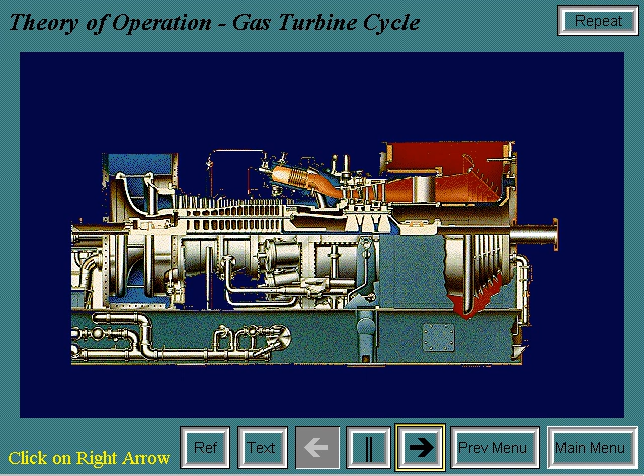A gas turbine operates by drawing in fresh air, then compressing it to a higher pressure through its axial flow compressor. Next, fuel is added to the compressed air and burned, which raises the energy level. This high-pressure, high-temperature air is then sent to an expansion turbine, where the gas energy is converted to the mechanical energy of a rotating shaft.

The conversion of work in the turbine actually takes place in two steps. In the nozzle section of the turbine, the hot gases are expanded and a portion of the thermal energy is converted into kinetic energy. In the subsequent bucket section of the turbine, a portion of the kinetic energy is transferred to the rotating buckets and converted to work.

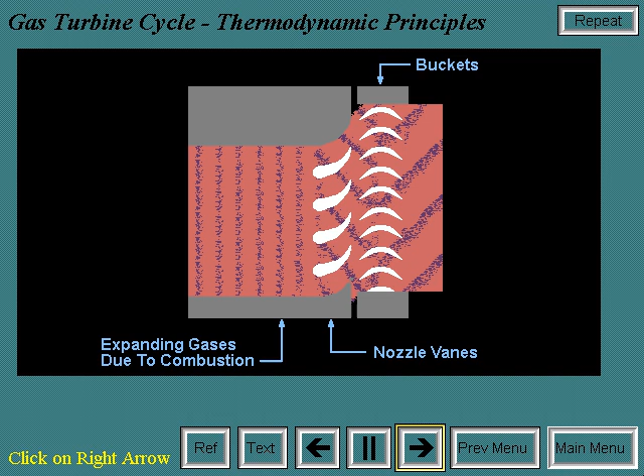Typically, more than 50% of the work developed by the turbine section is used to power the axial flow compressor. Since the gas turbine is an ambient air-breathing machine, its performance will be changed by anything affecting the mass flow of the air intake to the compressor. The most obvious are changes in the reference conditions of 59 degrees Fahrenheit and 14.7 psia.

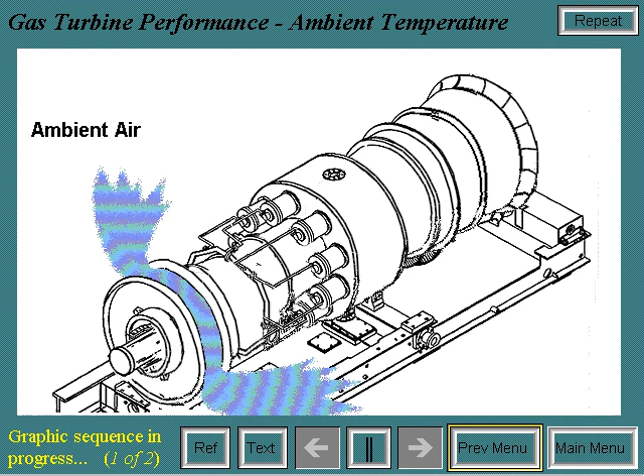Depending on the unit's cycle parameters and component efficiencies, ambient temperature will affect the air mass flow, which in turn will change output, heat consumption, heat rate, and exhaust flow.

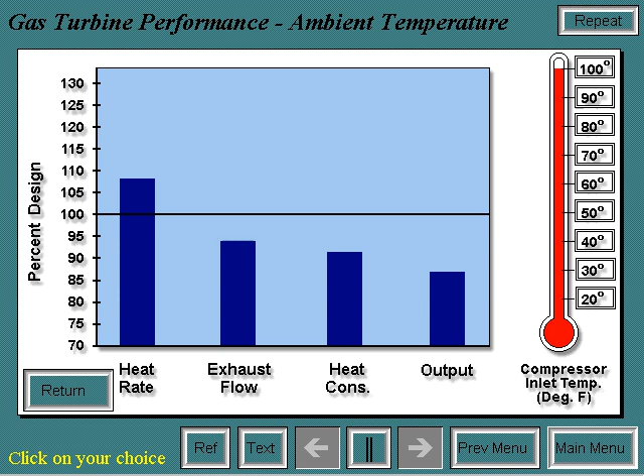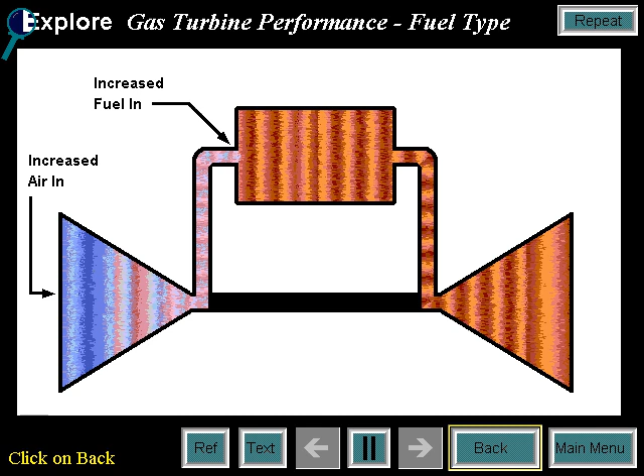When burning lower heating value fuels, turbine mass flow is increased because more fuel and air are required. This drives up the compressor pressure ratio, eventually encroaching on the compressor surge limit. This means that such a large volume of fuel is required to fire the machine that it begins to push back on the compressor discharge pressure, causing a reverse flow to occur in the compressor.

The compressor rotor is assembled by vertically stacking the wheels. First, the compressor forward stub shaft and first wheel are put into the stacking pit with tie bolts in place. Then each wheel is slid vertically over the tie bolts. In the case of the MS7000 EA, there are a total of 17 wheels on the compressor rotor.

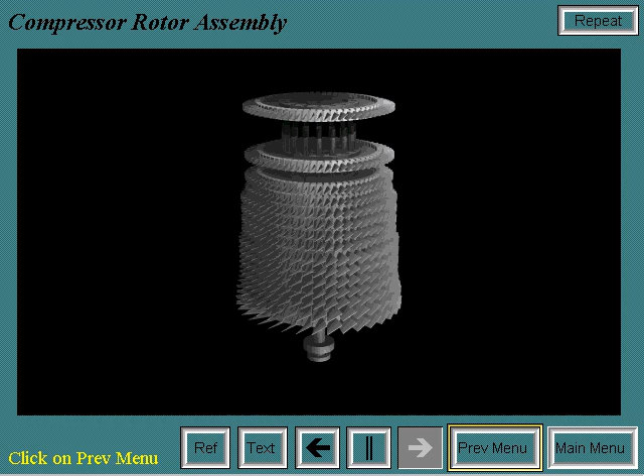Once the last wheel and aft stub shaft are stacked, the tie bolts are then torqued. Once the compressor rotor is assembled, it is slow-speed balanced to make sure vibration levels meet design standards.

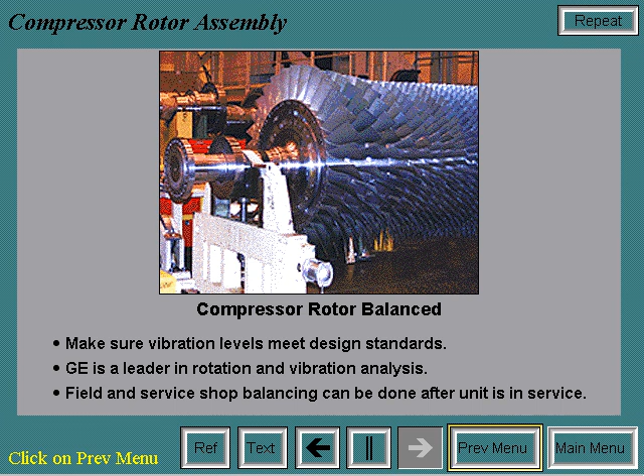GE is a leader in rotating equipment and vibration analysis. Also, field and service shop balancing can be done after the unit is in service.

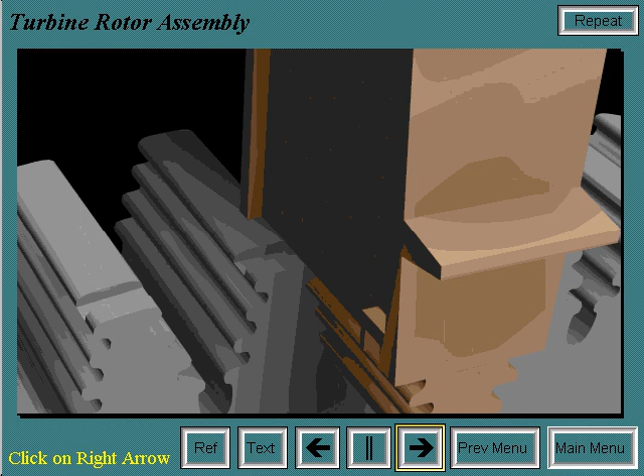The first step of the assembly of installing the first stage buckets to the turbine wheel is to insert the radial locking pin into the locking bucket dovetail. The first bucket is installed in the counterclockwise adjoining dovetail slot and is held in place with a D key. The remainder of the buckets are installed in this fashion, working around the wheel counterclockwise.

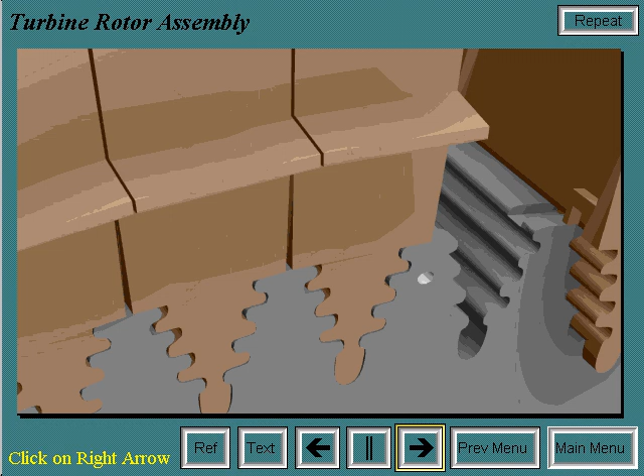The last bucket is installed into its dovetail, and the axial locking pin is driven into the wheel. This pushes the radial locking pin up to hold the last bucket in place. All the buckets are now locked onto the turbine wheel.

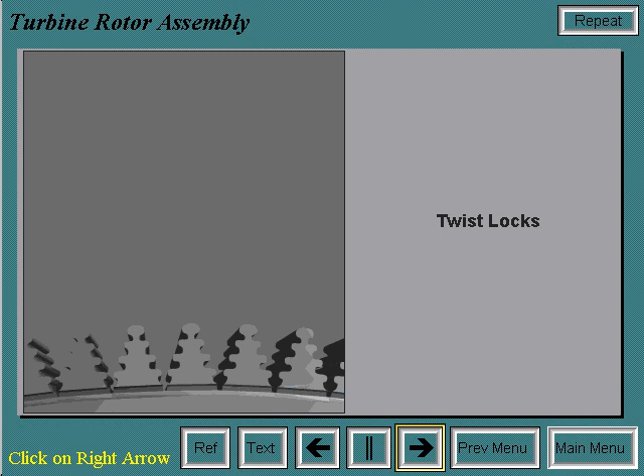Before the second and third stage buckets are installed, twist locks are put in place. Then the buckets are installed as a 360-degree ring. The ring is worked into the wheel gradually due to the interlocking Z-lock. Once they are installed, the twist locks are rotated to lock them in place.

GE is a leader in rotating equipment and vibration analysis.

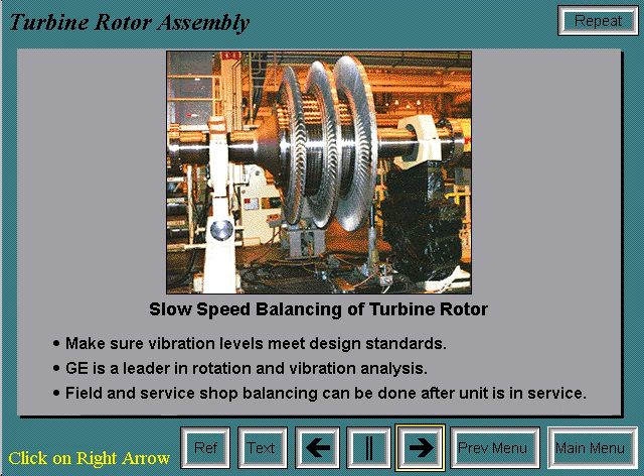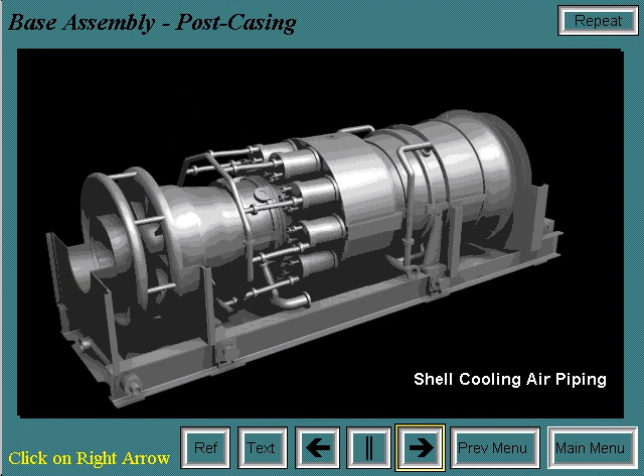Once the casings are on, the combustion system is installed. Next, the shell cooling air piping is installed. Air comes from off-base blowers to facilitate shell cooling in the turbine and exhaust casings. Then the inlet plenum is installed. After this, the exhaust plenum is put in place.

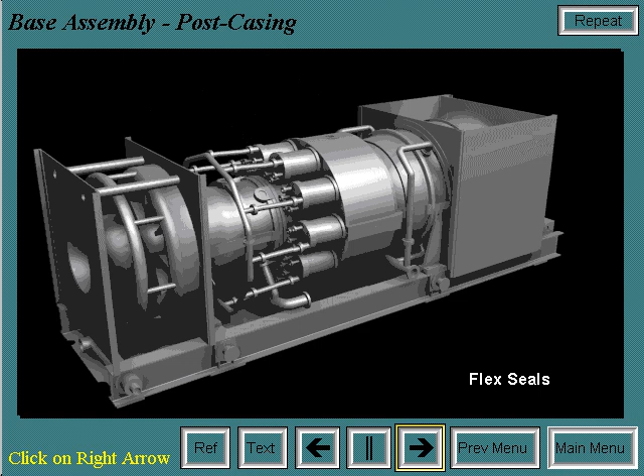The flex seals keep the exhaust gases from escaping into the turbine compartment or out to atmosphere while allowing for thermal expansion. Finally, the compressor bleed valves are installed. These are operational during startup and shutdown to protect the unit from surge.

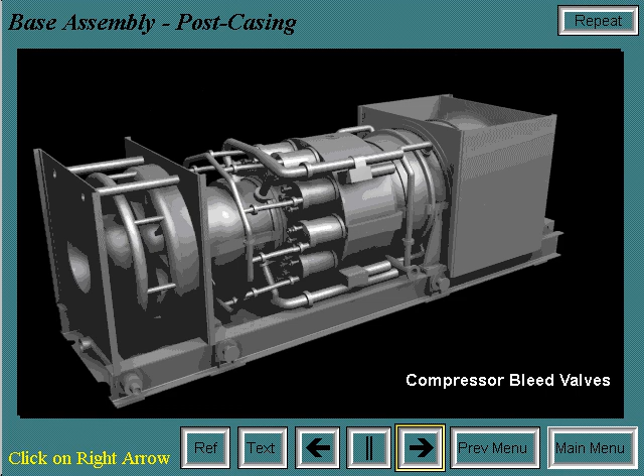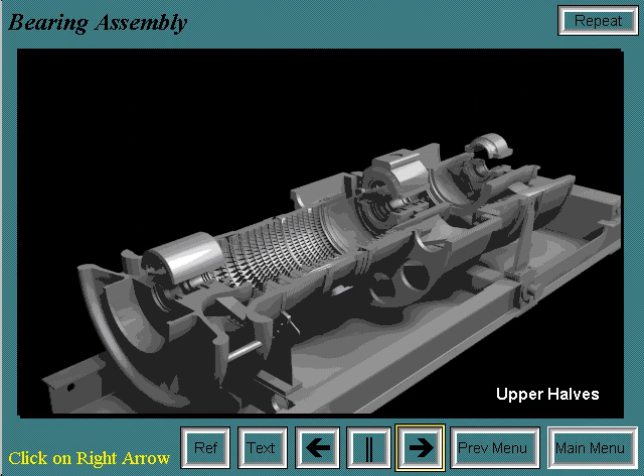The number 1 bearing is installed in the inlet casing, and the number 2 and number 3 bearings and housings are placed into their respective casings. The lower half is put in first. Then the upper half of the bearings and housings are installed. Then the bearings are aligned with the casings installed.

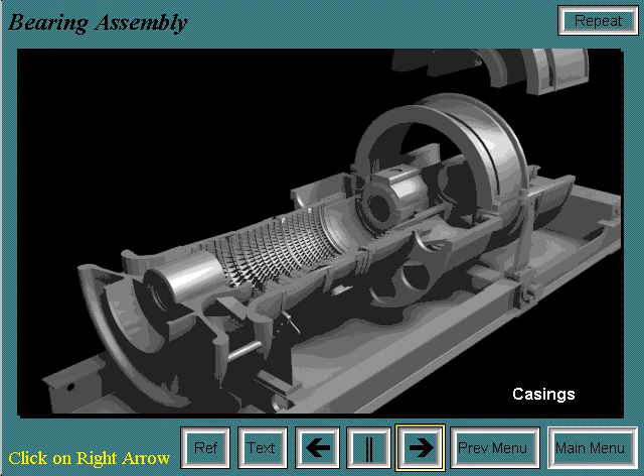The upper halves of the bearing housings and casings are then removed, and the air seals and oil deflectors are installed. The final step is the installation of the rotor and the upper halves of the bearing housings and casings.

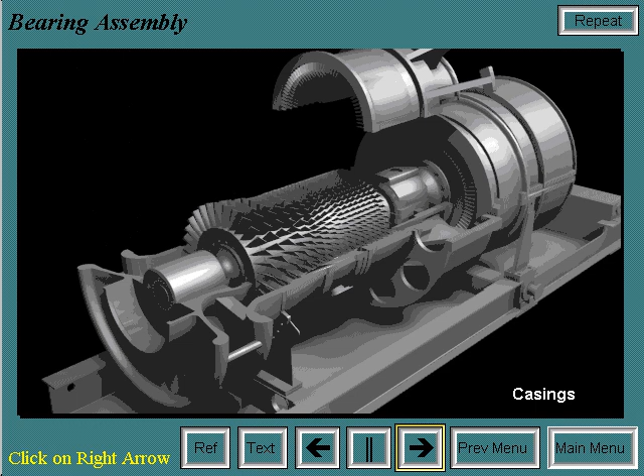To assemble the first stage nozzle, the nozzle segments are installed into the support ring. Alignment pins are then installed to radially align the segments in the ring.

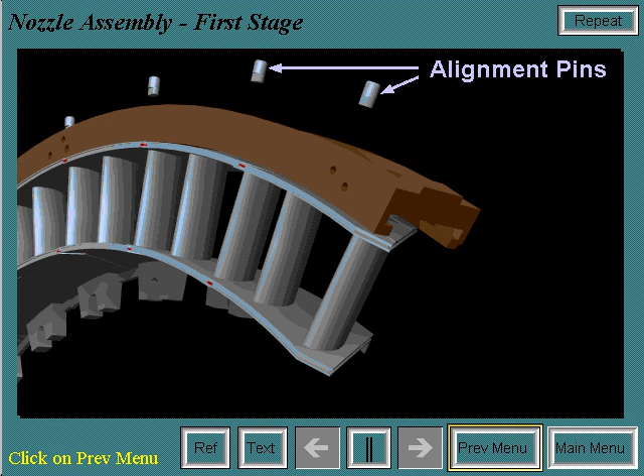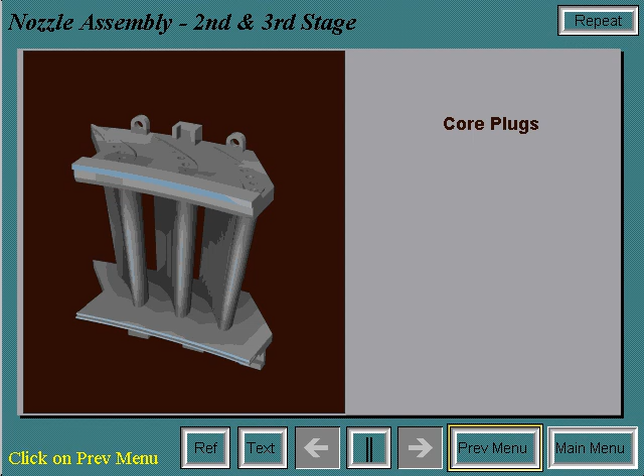To assemble the second stage nozzle, first a core plug is installed in the investment cast piece to allow for even cooling down the center of the bore of the nozzle segment. The diaphragm section is then attached and a pin is installed for nozzle to diaphragm alignment. Wheel space cooling tubes and plugs are installed in the diaphragm.

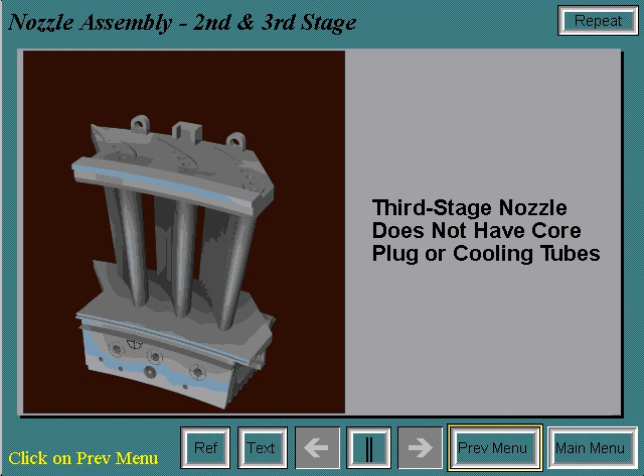The third stage nozzle is similar to the second stage nozzle, but it is not forced air cooled, so there is no core plug and there are no cooling tubes.

The assembly of the combustion system begins with the transition piece bolted to the first stage nozzle on its aft end and supported by the bullhorn bracket on its forward end.

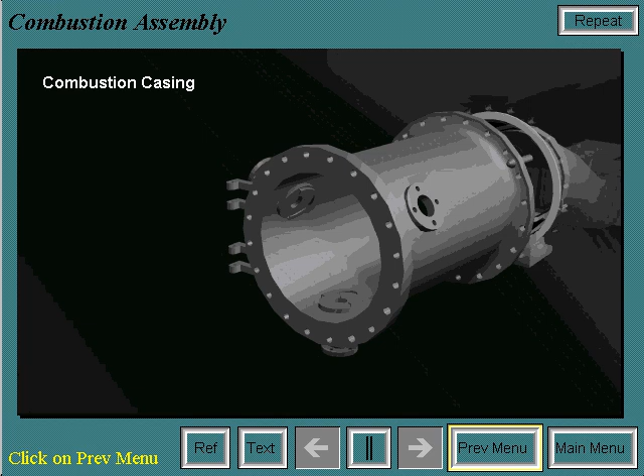Next, the combustion casing is bolted onto the combustion wrapper. Then the flow sleeve slides into the casing.

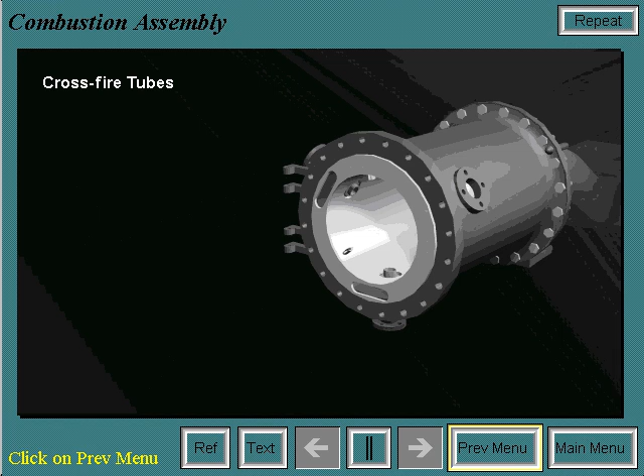The crossfire tubes are then installed, but pushed out of the way so that the liner may be installed. Once it is, the crossfire tubes are put into the crossfire tube collars in the liner. Retaining clips keep the crossfire tubes in place.

Next, the combustion can cover is bolted onto the combustion casing. And then the fuel nozzle is installed onto the combustion can cover.

Spark plugs and flame detectors are also installed on certain combustion cans depending on the vintage of the unit.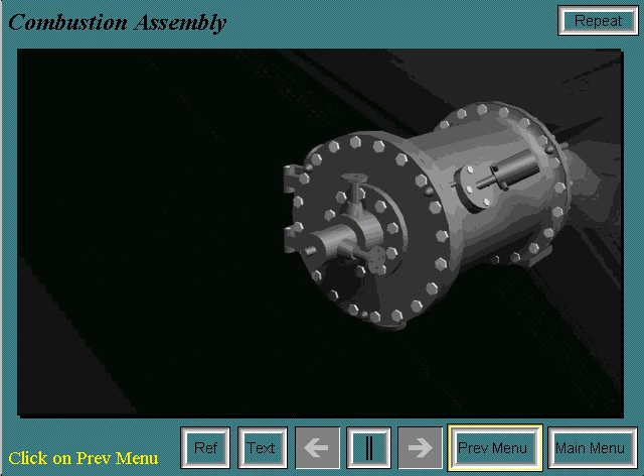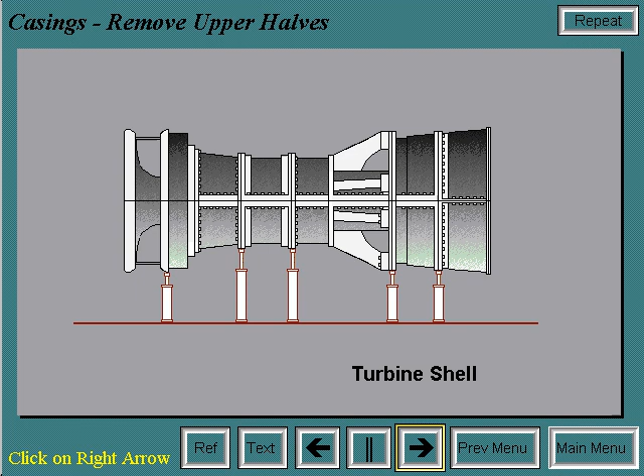As you know, the upper halves of the casings are removed to allow for internal component installation. All vertical and horizontal bolts are removed, and the casings are lifted off one at a time in the following sequence. First the turbine shell,

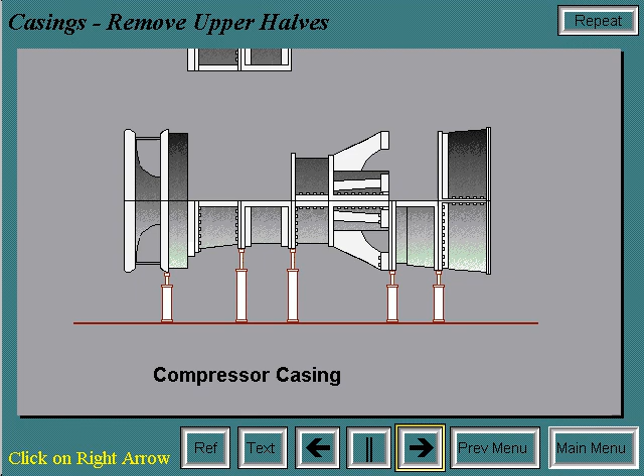then the compressor casing, then the inlet casing, then the exhaust casing, and finally the compressor discharge casing.

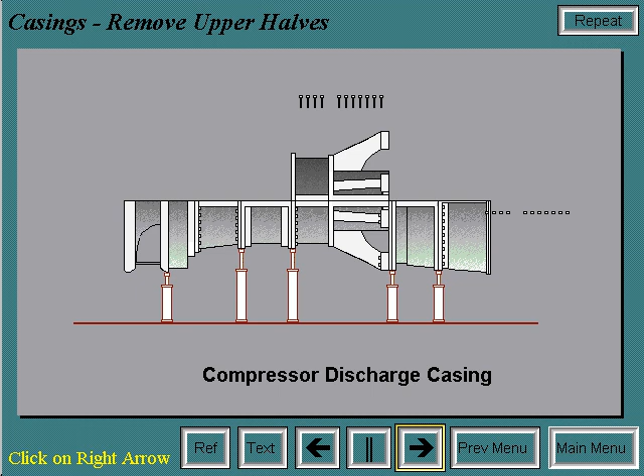To give you a mechanical analogy, check valves behave the same way as diodes in electrical systems. In this analogy, a fixed pressure to the main manifold is provided by the supply tank. The pressure at the main manifold can be regulated by the check valves A, B, or C.

For example, the pressure at point 1 is considered constant at 20 psi. If the pressure at points 2, 3, and 4 are higher than 20 psi, then there will be no control of the pressure at the main manifold.

If the pressure at point 2 decreases to 18 psi, and the pressure at points 3 and 4 remain the same, then the pressure at the manifold will be brought down to 18 psi, and System A is controlling.

As the operating conditions change, the pressure requirements at points 3 and 4 change. As the pressure, say, at point 3 drops below 18 psi, for example 17 psi, the manifold pressure will be brought down to 17 psi, causing check valves A and C to close and check valve B to open. Therefore, System B is now controlling.

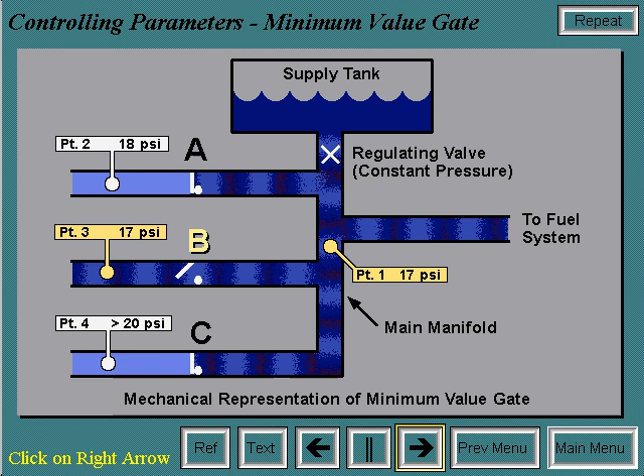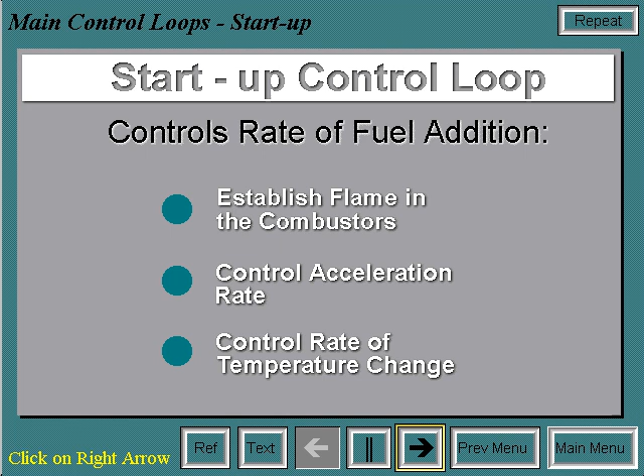The startup control loop controls the rate of fuel addition for several reasons: to establish flame in the combustors, to control the acceleration rate, and to control the rate of temperature change.

Acceleration of the turbine rotor must be controlled so as not to exceed the allowable forces on the rotor. Exceeding the limit can cause heavy damage to the rotor.

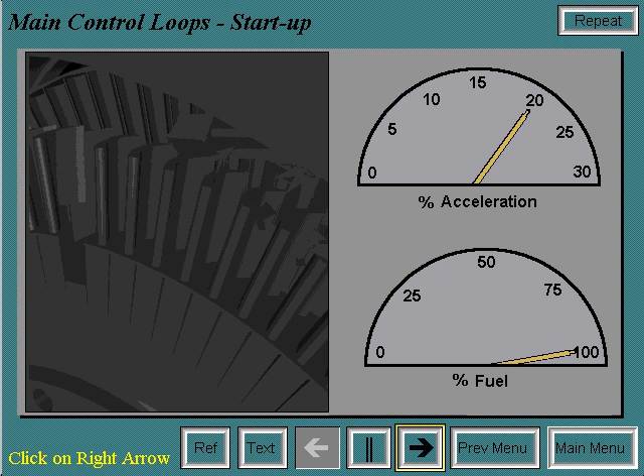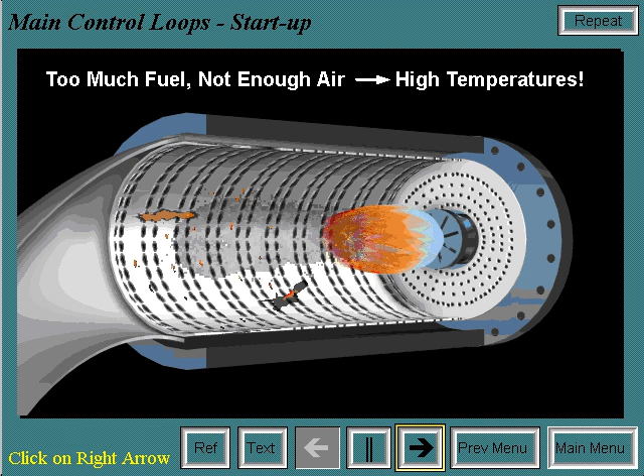During startup, the airflow rates are low. If there is too much fuel added to the combustors while there isn't enough air, temperatures could get dangerously high, potentially damaging internal hardware. And high fluctuations in temperature can reduce the life of the internal hardware.

Different materials heat at different rates, so the rate of temperature change must be limited at approximately 5 degrees per second.

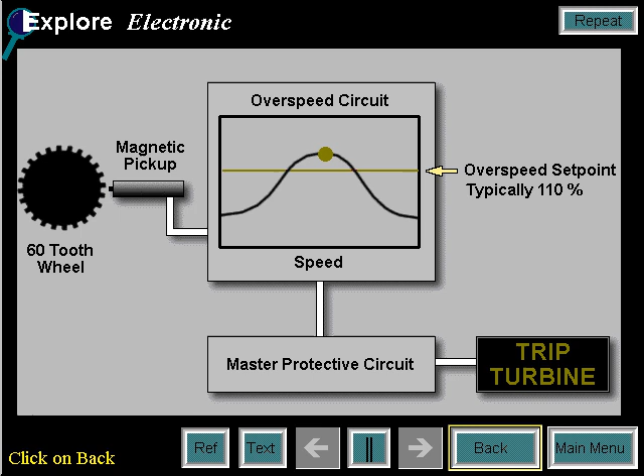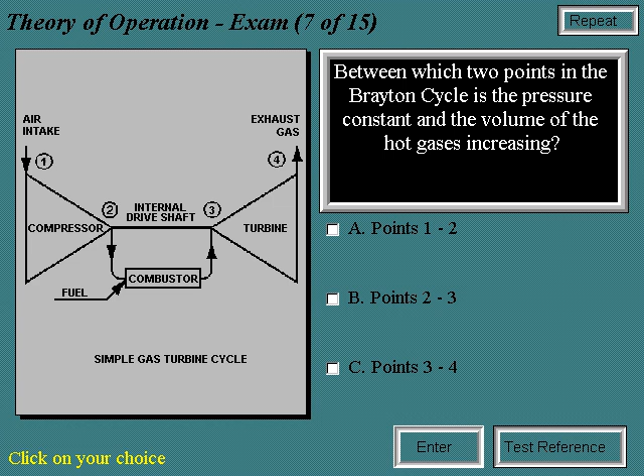Sorry, your choice is incorrect.